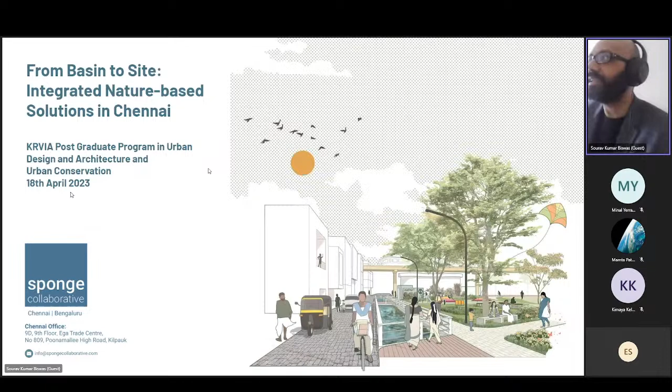Today I'll briefly go over what have been our efforts in trying to mainstream the Sponge City approach in India, what we have been learning, and how we have been advancing that at the basin scale through strategic basin planning and by trying to influence development plans, and then quantifying and qualitatively evaluating the feasibility of Sponge cities within Chennai through pilot projects, and what learnings we can get from it to really create systemic change.

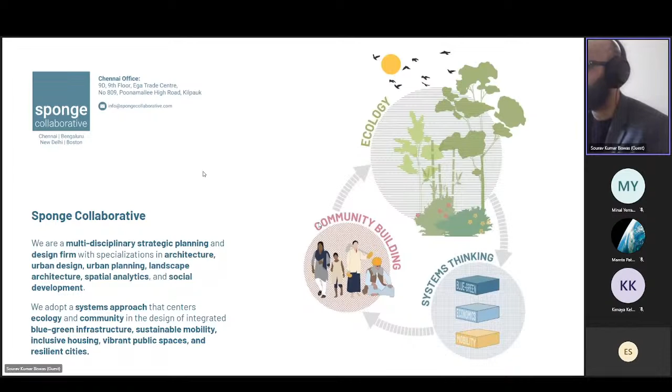So we started as a multidisciplinary strategic planning and design firm. We specialize in landscape architecture and urban design, bringing quite a bit of spatial analytics and centering ecology in the way that we plan our cities and our communities, and how we think about socio-ecological systems through a systems lens. So we're always integrating mobility, sustainability within blue-green infrastructure, integrating culture. That's something that you will see.

Our primary motivation is that we want to be professionals that help communities and cities adapt to climate change. Early on in my career, the 2005 floods in Mumbai basically triggered my interest in landscape architecture. The floods in 2015 in Chennai, followed by the drought in 2019, inspired our first publication, the Sponge Handbook Chennai, which is available online for you to download. That was where we first made the case that the Sponge City approach is really the most cost-effective and has a lot of co-benefits in helping cities adapt to climate change and also meet their service needs.

I'm sure heat waves are going to become a real issue in cities in the coming years. We also find the nature of urbanization actually placing our cities at even greater risk. So our risk threat is not just from climate change, but the way in which we are maladapting to climate change and the way that we are basically disrupting the nature-based solutions that could have protected us from issues that we're actively destroying through bad planning, and that we don't have any structures for how our cities are expanding into the landscapes that could have been building our resilience.

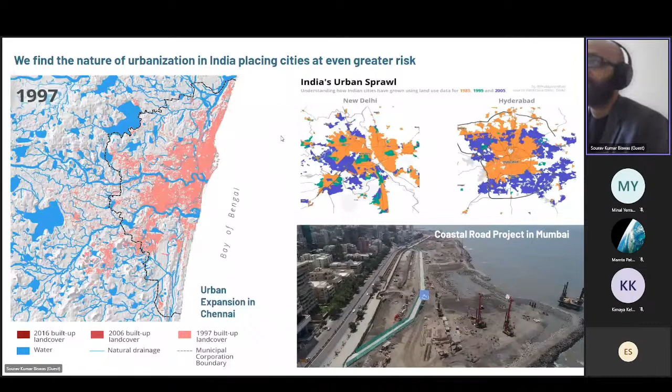So we are here to basically address climate change through the promotion and implementation of nature-based solutions, which have to happen at multiple scales. We have to protect the regional systems that work. We have to restore the ecological systems like water bodies and rivers that are either degraded or polluted, wetlands included. We have to enhance our natural ecosystems to actually be resilient to climate change that will place even greater pressures in more constrained environments. So we have to think about hybrid infrastructures. And we definitely have to construct blue-green infrastructure within urban areas that have completely removed the historic natural functions that used to be there. So how do we kind of bring them back through blue-green infrastructure?

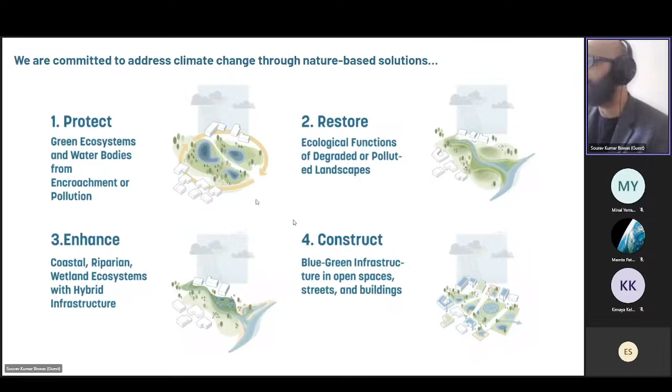We have two partners, Manushi and Praveen. All three of us had met at Sasaki in Boston after them having done their masters in Pratt and Berkeley. And so we met, we did the Chennai competition together that we won with GIZ. We did another competition in Kochi that we also won. You can access both of those entries online if you look for them.

And based on those early successes, we decided that we need to start a firm to really push the agenda in India. We've been dedicatedly doing this through a lot of lobbying, through discussions at various levels, trying to find opportunities through multilaterals and others. In some ways I wouldn't take sole responsibility, but Chennai has moved to the fact that they want to set up multiple sponge parks. They've seen the value of that given the risks they are facing.

We are currently helping the city implement at least one sponge park out of the dozens currently under consideration. We kicked off this whole thing in 2018, even though our firm is about 2 years old. In 2018, we wrote this publication with GIZ that summarized the application of blue-green infrastructure, what it means, how it can be integrated within the Indian context.

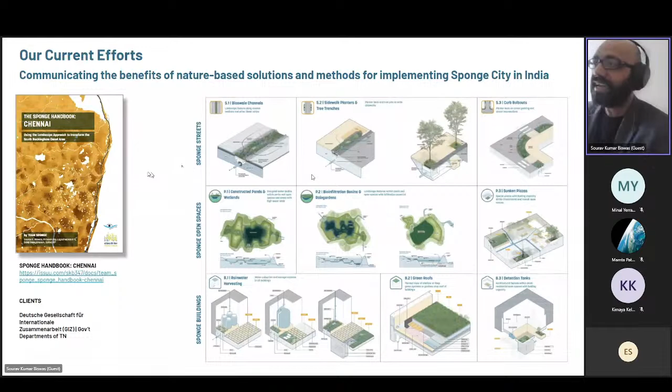We even showed them how to integrate that within the urban fabric in a site in Chennai, taking the basin approach, recognizing that every site has to understand the hydrological linkages that are part of a basin. So we're not just in a river, not just in a canal, we are part of a larger basin that drains into the river. There's also the invisible aquifer systems that are much harder to trace, but they're all part of this one system.

We can build resilience collectively, incrementally over time by being strategic about how we do short-term, medium-term, and long-term projects to eventually do things like canal rejuvenation and then benefit from the real estate benefits that come off of it, and how all those systems, once built, actually make a new development more resilient than what was previously in place. That should be our goal in the kind of developments we do.

Following that, we had successes in Kochi, where we did a detailed project report for the rejuvenation of a canal precinct, where we had a vision for the precinct level, and for how to rejuvenate the canal and connect it to mobility networks upgraded for bike lanes, but also integrating blue-green infrastructure. So how all these systems come together along the streets and also within the open spaces.

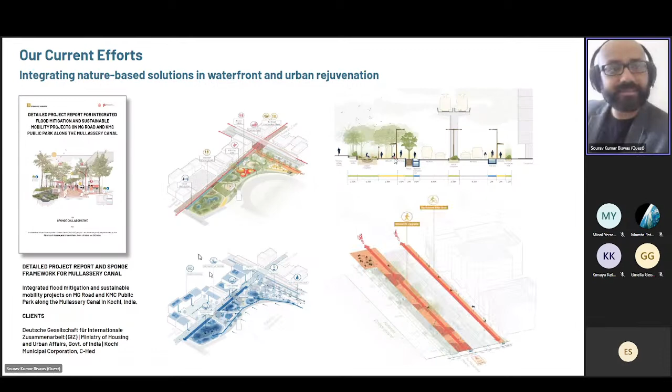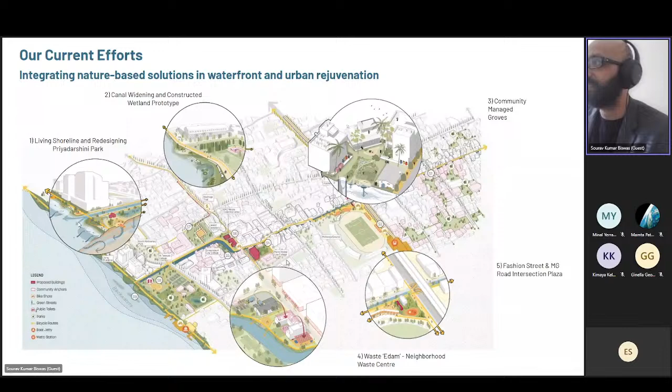The idea is always, how do you find spaces within the city that are designed to flood? So the things that flood are not the streets, not the homes, but these open spaces and blue-green infrastructures within the street. This was the larger vision we had for the neighborhood and how that ties together around the canal. We had different interventions based on aquifer recharge, vendor enhancement, recycling and community-based infrastructure, and even shoreline enhancement and wetland rejuvenation.

A similar project in that vein was in Coimbatore, where with TU Berlin we did a DPR for a sponge park, which integrates social amenities with blue and green infrastructure. Here you can see how we had a social loop with a lot of programs around, very well shaded to counter the heat island effect. Basically we are grading the entire park and creating provisions for water to flow during moderate storms, but also for water to go into the aquifer during extreme storms.

So we are creating these levels of how water collects in different places. There's a wet function and a dry function, where basically it's a park throughout the year, but during any flood events, it also serves as infrastructure.

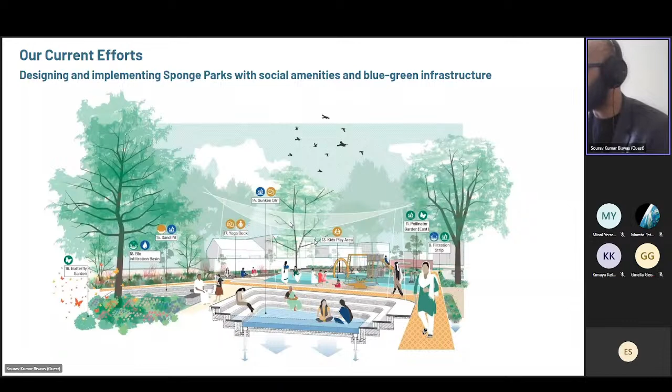We take this concept even further in a peri-urban park we are doing in Chennai, which is a 17-acre climate park, as we are calling it. It's basically a showcase of all the regional landscapes of the Chennai region and how each of them can play a role in climate adaptation, whether it's through the greening of forests or the renaturification, you could say, of—instead of lawns, celebrating meadows—and how in the region, in the farmlands, you build these...

Retention ponds. And then we also celebrate these kinds of hills and hillocks found in the region, through some architectural moves. We also celebrate the coastal landscape, even though the site is somewhere in the peripheries, through the integration of water-based play and water features that teach kids about how important all these ecosystems are. So we focused on these 4 ecosystems found in the Chennai region and found ways to reflect that within the design, planting, and massing of the parks.

So you will find these 4 different zones within the park, which have very distinct, color-coded signages. You have this continuous ribbon connecting all the different zones, but the landscaping of every zone, the architecture, the color schemes of each zone, and even the programs tie back to this idea of what are the regional landscapes, with some signage on how it can help. It's also linked to an archaeological interpretation center because it's located right off of an ASI site.

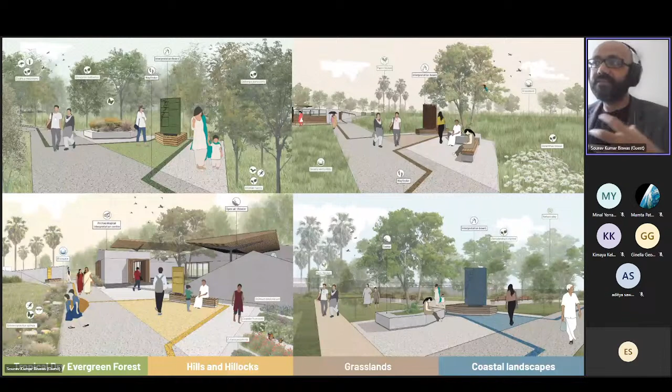We're basically bringing in the geological and archaeological histories of the region with an environmental lens, talking about climate risks. That's just an overview of how we are bringing that approach through multiple projects. But the core of my lecture is about how we are taking a basin level view, how all these systems come together in our thought process.

I'll follow this up with a detailed sponge implementation project and how we went from feasibility towards implementation. This is a project we did, funded by a foundation, where we did a river scale vision. Now we are also working with the CMDA on informing their 3rd master plan on the theme of climate resilience, where this view is coming into play.

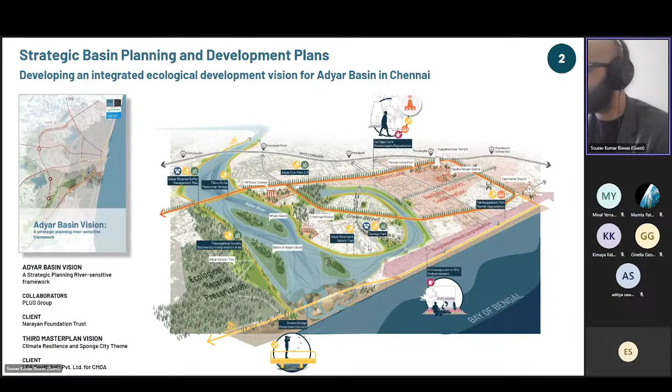One of the things with Chennai, as you will also find out about Mumbai, is the number of basins within the metropolitan area. For Chennai, which is a coastal area with a lot of peripheral landscapes, this metropolis straddles about 4 basins and sub-basins today, but the metropolitan area is expected to expand into 3 more basins in time.

The drinking water reservoir system is also very much linked to the health of the basins. We also have many estuaries and lakes along the shoreline. It's a very diverse shoreline with many different basins and water bodies that are all connected with each other, but all these connections are basically getting severed over time.

We used to have traditional landscapes in the region that connected all these different water bodies. Sometimes you would find temple tanks designed to hold water during the monsoons and allow it to seep into the ground. But all these linkages that used to happen with the water bodies get disrupted by the way urbanization happens, and also by the way mining and other encroachments pollute those ecosystems.

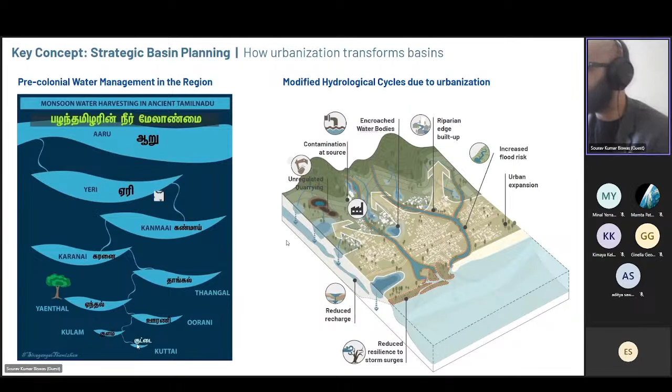So we are trying to counter these impacts by introducing the water sensitive design approach, where instead of thinking about how we very quickly rush water away, not treating the city as a rain jacket, because what it eventually does is create flooding either in the canals, rivers, or reservoirs. It's also not conducive when a high tide comes in and makes that conduit less effective.

So instead of relying on a single conduit, we're basically taking the sponge city approach, finding different ways within the city through open spaces, green roofs, and green streets for water to be delayed. So a storm event doesn't immediately become runoff and land up in the stormwater drains. There is a delay, and that delay builds resilience, but there's also absorption and storage.

All these different functions basically work together to reduce the risk of flooding while creating a lot of co-benefits, because parks are great for many other things. Trees help not just with flooding, but also with urban heat. So that's the kind of approach that we are promoting.

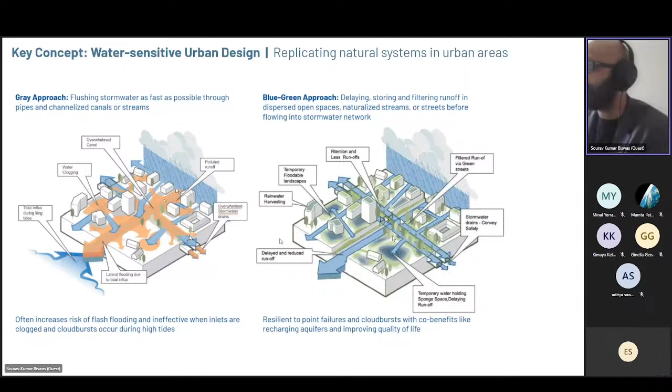Depending on the metropolitan area, there are very different ways in which water resources are managed. It's different in Chennai, different in Delhi, different in Mumbai. But the reality is a lot of water body management, whether rivers or lakes, is very fragmented across different silos. So within that, we are trying to use the tools of planning to embed resilience, whether it's disaster risk resilience or urban water resilience, and we have to be cognizant of how we navigate that.

So in Chennai, we have the opportunity now to basically inform the priorities of the next master plan.

This is something the Metropolitan Authority has had the vision to do, which is actually set up a process to highlight what should be the principles that guide the land use of the third master plan. That is not just a bureaucratic exercise in checking boxes and arbitrarily assigning land uses, but there's actually a vision for it.

From our perspective, we think that no master plan in most Indian cities has actually recognized the ecological systems at the metropolitan scale and what it means to manage urban growth by absorbing the principles of nature-based solutions. So the principles of protect, restore, enhance, construct that I showed earlier, we are basically trying to spatialize as a framework at the metropolitan scale, using a lot of different data sets. I myself am a spatial analyst by training.

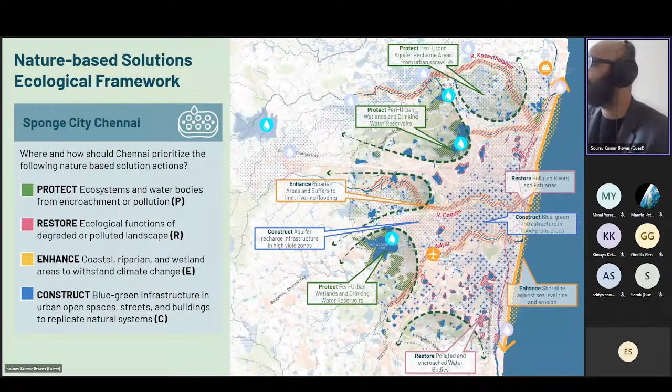So we are identifying which places are important for recharge, which places have a lot of wetland ecosystems, and in a way trying to promote a five-fingered corridor approach rather than continuous urban sprawl. Then we find ways to restore polluted water bodies, or the water bodies currently getting encroached upon in the peripheries that haven't been completely lost as in the urban core. And definitely we have to enhance our rivers and shorelines to deal with additional flood risks happening every year, erosion risks, and saline intrusion risks happening because of sea level rise and cyclones.

So how do we enhance these ecosystems? Finally, we are identifying places with a lot of flood-prone urban areas where we can construct blue-green infrastructure. And in places conducive to aquifer recharge - it's not conducive everywhere, it depends on the soil - we basically construct aquifer recharge infrastructure.

So we are laying out a metropolitan scale strategy within which we are exploring a basin level vision, where we want to emphasize that a river is not just a river. A river is an interconnected landscape where all these streams, when rainfall over the territory drains into the rivers, it's also connected to the groundwater, it's connected to all these things.

So it really matters how the land use evolves, not just in and around the river, but within the whole basin, because it has a lot of impacts on water quality, on sediments, and basically on flood risk. So how do we think about the growth of the city along these two major corridors while also recognizing the health of the basin that's linked to a very important river?

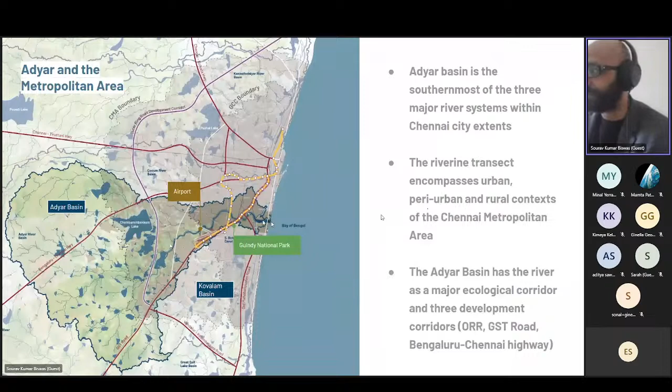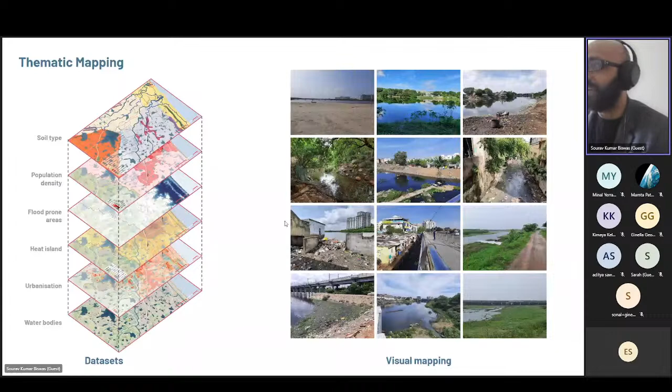So we take on a very geospatial analytical approach, but we also take on a very qualitative on-ground observation approach. Combining this, we come up with character zones for the entire basin, recognizing each zone as a socio-ecological label. So if this is an estuary, what is the land use linked to that estuary? That's an estuary residential zone.

This has a lot of marshes and forested areas, but also that's where IIT Madras and a lot of institutions are, so that's what we're calling it. Here we have an airport, very similar to what is done with the Mithi River - the runway runs right through the river, increasing the flood risk, and this airport basically gets shut down almost every other monsoon.

And then we have the riparian peri-urban zone, and then we have these industrial zones where they've built industries just upstream of a drinking water reservoir, where it's definitely important to think about those relationships, and also these headwaters, which are currently rural but are definitely going to urbanize in the coming decades and years.

And we use these zones to engage many stakeholders to get feedback on what should be the key strategies. Then we come up with a framework for different strategies across five systems: an ecological system, a risk and resilience system, culture and livelihoods, open space and access, and what all these factors should mean in terms of urban development and housing. So it's basically an integrated development strategy that's ecologically informed and really cognizant of both the housing demands of the city.

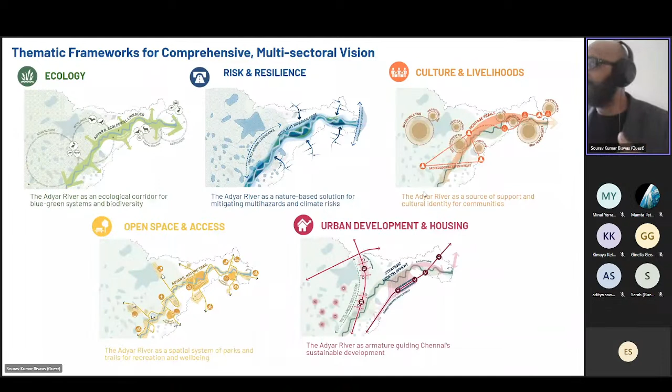The fact that it needs to develop, it needs to grow, it needs to densify, but also it needs to be aware of where not to build, and how to integrate open spaces with recreational amenities to create more buy-in from communities for the continued preservation of open spaces, trails, and streams.

And also keeping in mind that there are still many livelihoods linked to coasts and rivers, and that there are new forms of livelihoods coming up around the river that are more industrial in nature, and how we can basically recognize the historic culture that the region has.

When we talk about a basin vision and want to replicate this approach at the metropolitan scale, we're talking about an urban development framework based on a livelihoods framework, a risk and resilience framework, an open space framework, and an urban ecology framework that forms the foundation.

We believe the role of land use planning is primarily about where not to develop and where to encourage growth, not so much to micromanage exactly what land use goes where, because our institutions aren't capable of enforcing that. But we should build the capacity to enforce where not to grow and where to grow intensely, and how each development could be water sensitive and climate resilient.

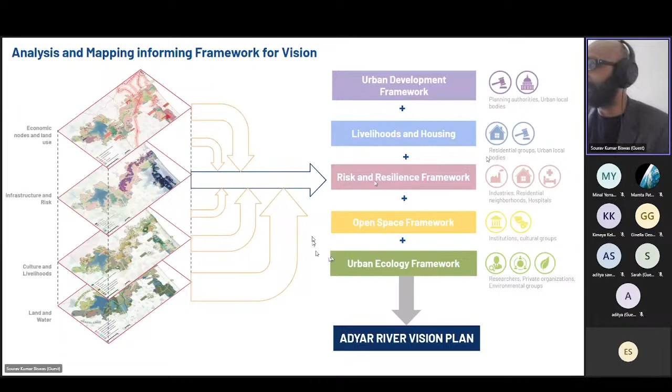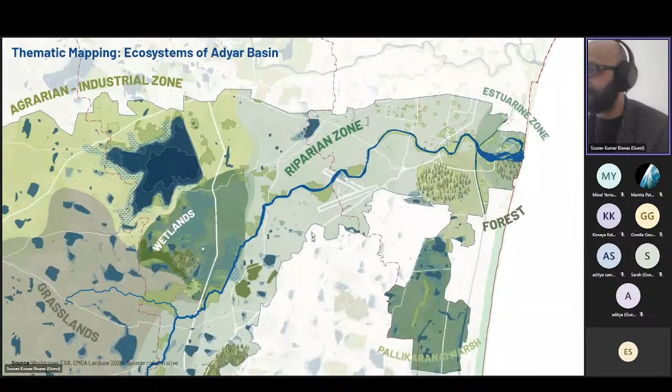So we base all our frameworks on a kind of ecological mapping where we recognize the different zones around the basin and what that means for the riverfront. That basically informs goals, so each of these analysis frameworks has a goal of how we enhance ecological value.

That means recognizing not just the river as an ecological corridor, but also how those corridor linkages can extend into the city, and how we can be cognizant of the different ecosystems the river runs through, from estuary to upland grasslands with wetlands and forests in between.

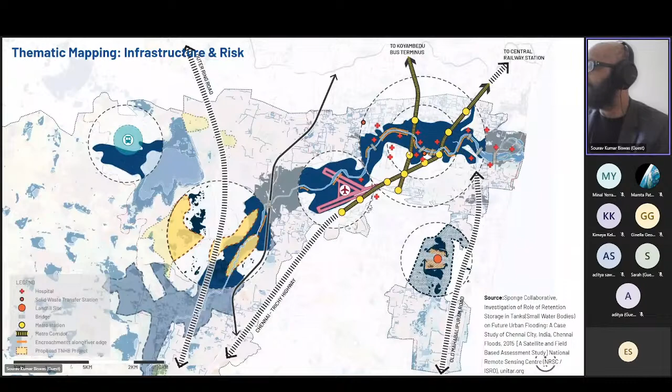Then we start increasing or improving water quality through restoration efforts and enhancing it in other places, by mapping the flood risks with critical infrastructure like ring roads, bus terminuses, and hospitals—places that can increase pollution. The airport is also a critical infrastructure.

We come up with a goal for how we deal with multi-hazard risks—what are the strategies, where those strategies can land, how we create room for the river, that maybe there's a potential scenario where 20 years down the line, that airport gets decommissioned.

Chennai is already planning an airport in a different place. So then we start creating room for the river and maybe even have water sensitive development around there.

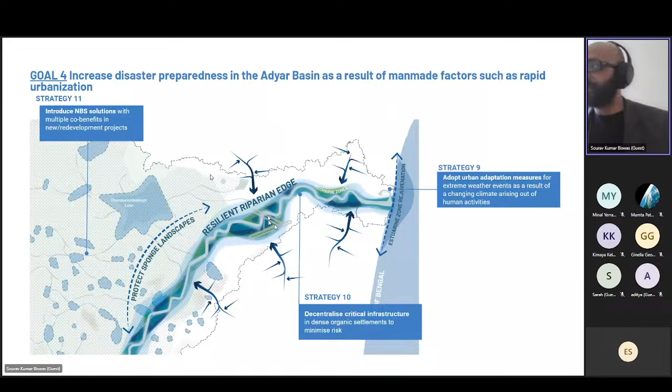We also talk about disaster preparedness, which is not so much about structural solutions, but non-structural solutions for how communities and early warning systems can help.

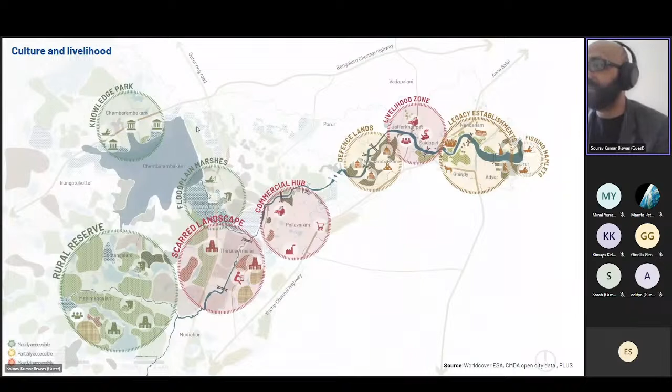We start mapping what are the cultural aspects, what is a scarred landscape, what is a livelihood zone, where are the fishing hamlets, where industrial parks are opening up, and what could become a kind of rural landscape reserve for the city, and how we celebrate that through archaeological site circuits and heritage trails.

We link those heritage trails up with the livelihood zones coming up, making sure those livelihood zones are compatible with the health of the river. So we do have a tannery hub—we just have to figure out how to limit pollution from that hub into these systems.

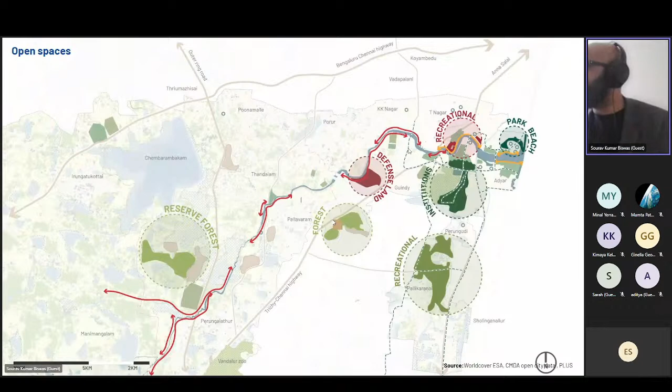So these are just a summary of the different strategies. We have a strategy on open space where we've mapped out the adjacent open spaces, some of which are public, some semi-private or semi-public, but where do we completely not have access to the riverfront, and how can we open up that access.

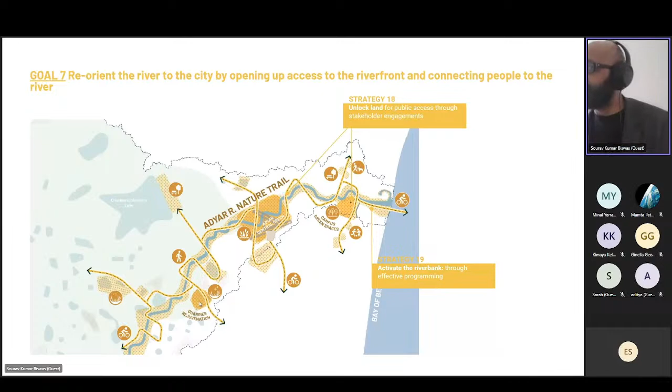Through a set of interconnected trails, we rejuvenate some of the quarries scarred because of mining, open up campus green spaces that aren't currently accessible, and really rethink what happens to the airport in the near future. This is the idea of creating 15-minute neighborhoods where nobody's far from a park—even if they're not near the river, they're part of a trail system that links them to it.

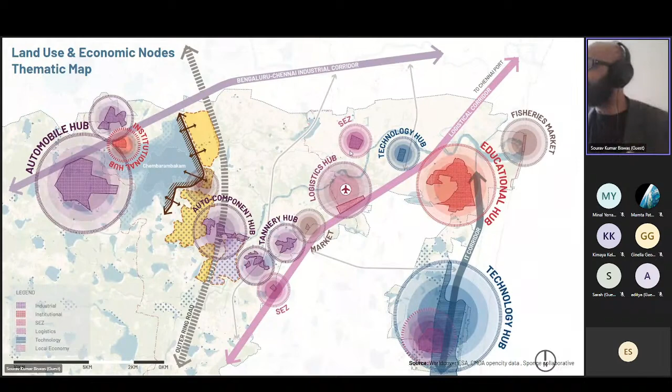Once you recognize how the city is going to grow, where this outer ring road is going to keep building up, where the automobile hubs are, you have to be cognizant of that and keep the protect strategy in mind—finding ways to densify where it's safe from a risk and ecological perspective.

So we're not encouraging sprawl. We're recognizing where transit-oriented development happens, and maybe there's an alternate way for urban villages and rural upland areas to develop if they're not within the corridor, and both can coexist as a diversity of built typologies in the metropolitan area.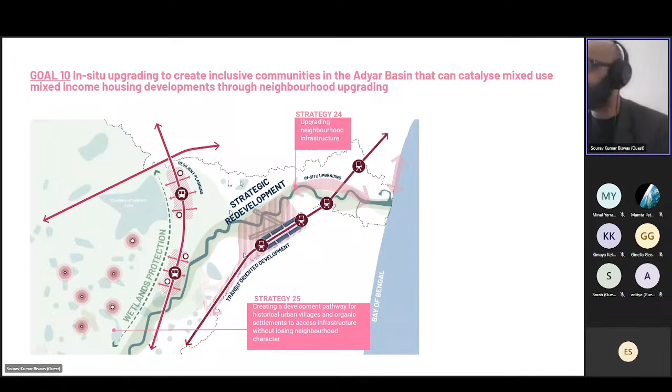That really preserves this rich network of water bodies, which is important for the flood risk of the entire metropolis.

And what we did after those high-level frameworks is we took the 6 zones we talked about and actually landed all those goals within those zones in the form of very specific projects.

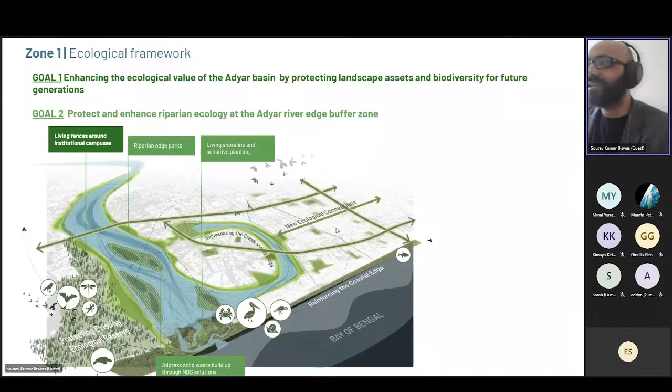So I'll quickly just run through what the ecological framework looks like in the estuarine zone, what the risk and resilience framework looks like when it lands within the estuarine zone, where are places that we can create room for flooding, how we can restore the estuarine area, create access along this broken bridge that we can repair, and then connect that with a cultural loop that connects with the temples and the churches and other open spaces

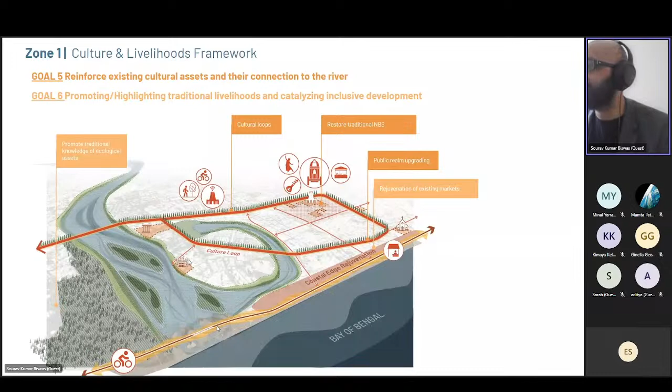And what that cultural trail means in the form of other recreational loops and the pedestrianization of certain areas and the introduction of bike trails and other trails that have currently not been imagined as part of the city's open space network, and how all those different frameworks land in the form of the creation of an urban corridor that's part of, at least in this part of the city, a heritage district conservation, and how, given that there's a bus terminus here, we can think about somewhat of a water sensitive dense development here.

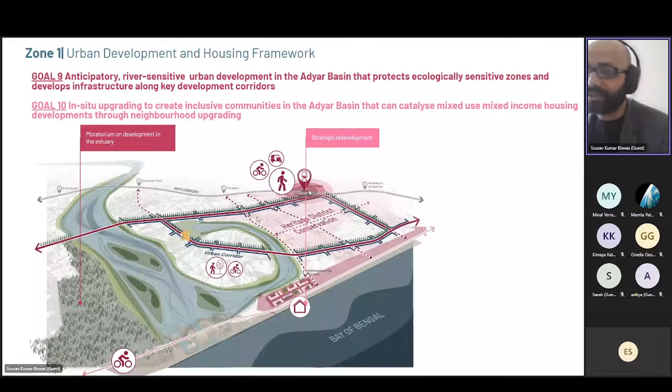But we definitely don't allow development in and around the estuaries in places that are already very well forested. But this also belongs to the Theosophical Society, so this might not open up to development as much. And that together basically gives you a framework and a strategy for each of these zones.

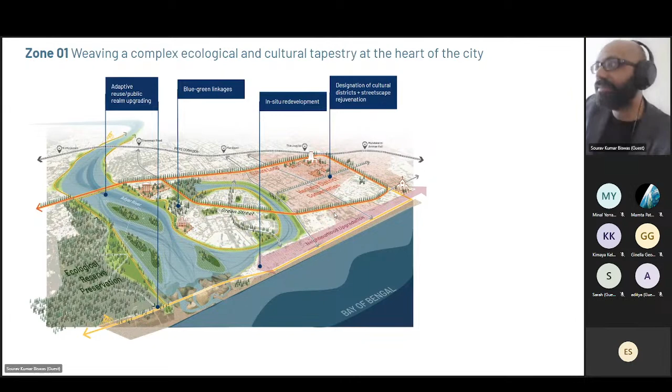We think a river cannot be seen as just one entity. We have to really be respectful and sensitive to the different zones. So we have all those themes coming together to create a vision for this zone. We have a vision for the institutional zone where we have Anna University and IIT Madras and many other institutions, how that can front a kind of institutional connection to the river.

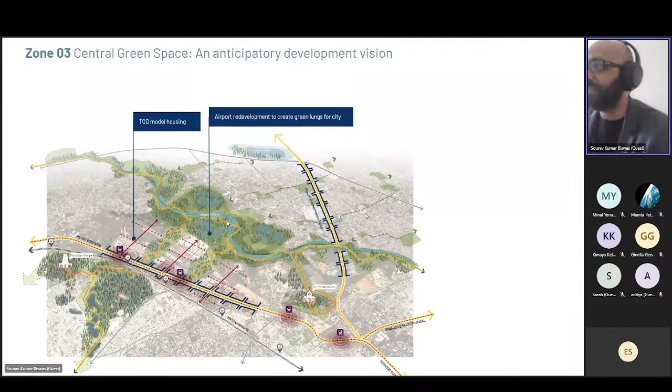And this is basically us reimagining the future of the airport land, where the airport goes away, the runway becomes an armature for a mixed-use transit-oriented development, but a lot of the site basically becomes room for the river, where now the Adyar River finally has that space to flood instead of flooding the runways.

And then much further on in the peripheries, we recognize and anticipatorily protect the streams, not just as ecological risk and resilience enhancing networks, but also that they could turn into open space trails. So again, we are creating a double purpose for an ecological amenity, an ecological system, by turning it into an amenity. So there's more buy-in.

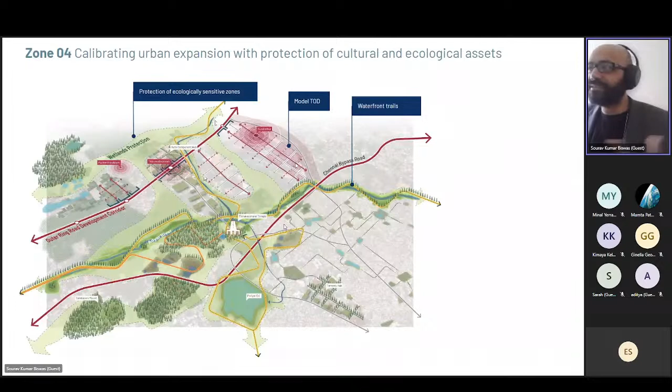And then once the city has planned where not to develop, then you start structuring development around transit nodes, around transit-oriented developments, and making sure everyone has access to the services that they need.

And then finally, in the very uplands, where we have a series of urban villages, we are talking about an alternate future of how we really treat these landscapes and these settlements, how they can still participate in the urban economy, but they don't need to be the city. And maybe it can benefit from cultural loops, tourism loops, agro-tourism, many different aspects, where we are keeping a kind of wedge landscape preserved within the metropolis area.

And this is something that you might see in many Dutch cities. You see it in Chengdu in China. It's what Copenhagen was promoting through the five-finger approach, where you have these green wedges as part of like a lung for the city. And these urban villages can still participate in this urban environment, but in a different paradigm of development.

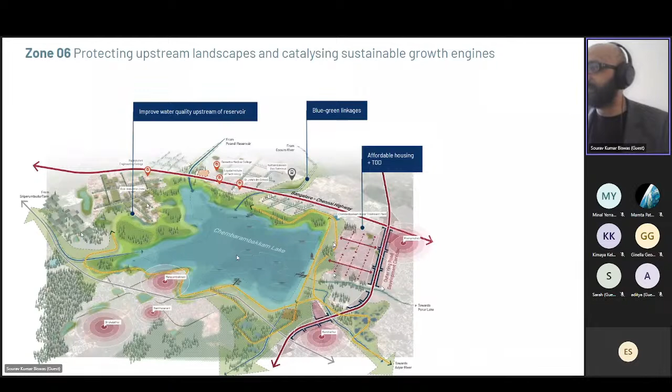And then finally, in zone 6, which is, like I mentioned, just upstream of a drinking water reservoir, you have industrial townships. So how can we make it an eco-industrial zone through the creation of buffers? And how, because of the ring road, there will inevitably be future development here. But it might as well be that the future development is transit-oriented, and that we are creating the buffers that are needed to prevent the runoff from polluting the reservoir, and that we open up the reservoir also for community access. And that's the kind of big idea for that zone.

So all of that gives you an idea of how we are tackling this at the basin scale. And very quickly, I'll show you what we are achieving at the site scale with the sponge park. This might be one of the country's first sponge parks, which was the result of a very detailed feasibility study that we did.

This might be of interest to you if you're interested in this topic. Basically, the design of stormwater drains is dictated by a CPHEO manual that requires cities to only be resilient to a 1 in 5-year flood event. So what we set out to prove is: can we manage a 5-year return period storm through the construction of blue-green infrastructure? Will that network be feasible spatially to construct in an urban neighborhood? And if we do it, is it more cost effective than gray infrastructure?

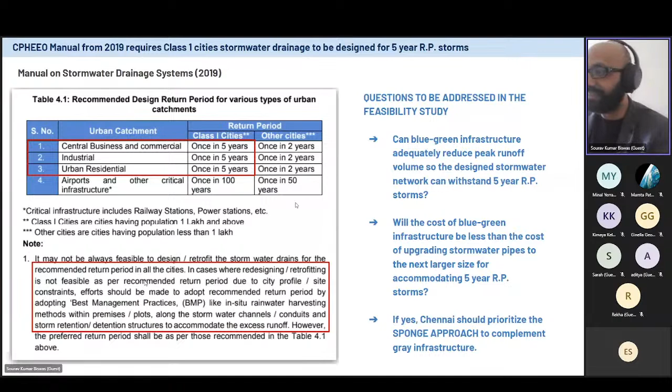If so, this should become the way blue-green infrastructure is integrated into the country, because the manual says if it's too expensive to manage this level of flooding, then try to supplement it with best management practices, which includes a lot of the strategies we're proposing.

One thing we wanted to point out is we are working in another basin of Chennai, in the north, the Kosasthalaiyar Basin. We picked 2 flood-prone neighborhoods to see where our strategies would be feasible. It turned out, after doing a lot of studies, that it's more feasible on this side, so that's what I'll zoom into.

One thing I want to bring to your notice, if you're interested, is we were initially supposed to be planning for 2-year return period storms, which is before the new manuals. And we think even designing for a 5-year return period storm is not adequate.

Basically, what it means is not that in a 5-year stretch you're only going to get that storm once. It means that in any given year, there's a 20% chance of a storm event exceeding the level of that return period storm. So return period storm basically determines how much rainfall is going to occur, and people design stormwater drains around the peak runoff volume that event creates.

People have the misassumption that a 1 in 5-year storm means in their entire tenure it's only going to happen once, when in reality, in 5 years there's a 67% chance it's definitely going to happen, or storms that exceed it. In any given year there's a 20% chance. So people are playing with the risk of only being able to manage these storms even when a stormwater network is constructed. In places that don't have stormwater networks, the risk is just unmanaged.

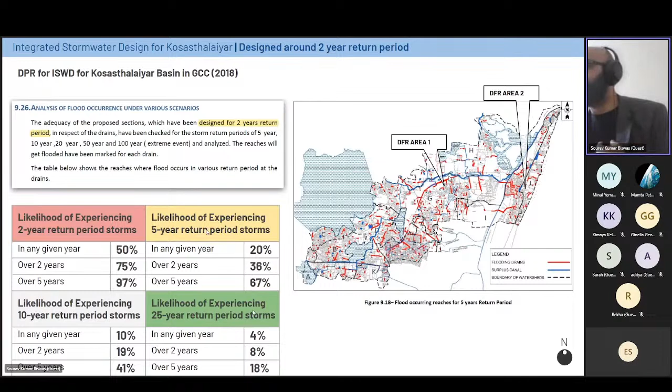What we actually set out to prove is that through the implementation of our network, we are even able to manage a 25-year return period storm without making any upgrades to the gray infrastructure that was designed to only handle the 2-year storm. I think that's a big finding we are going to promote publicly as soon as this project is done.

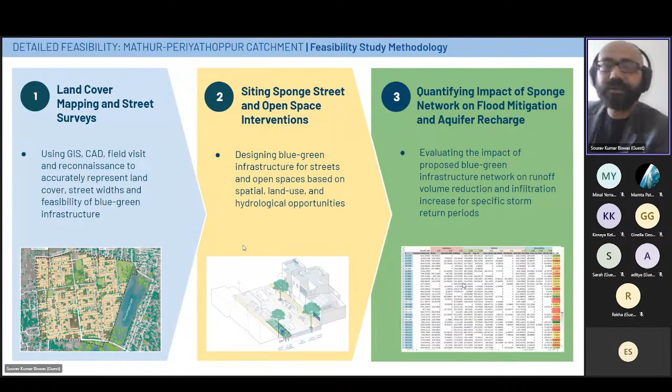We take a very scientific approach to this. We did detailed land cover mapping and street surveys in GIS and CAD, with field visits and reconnaissance. We then evaluated all the streets and open spaces for their spatial potential to integrate blue-green infrastructure. And we worked with IIT Madras and other engineers to quantify the impact of this network on flood mitigation and aquifer recharge.

I don't know how many of you want to move into the infrastructure sector after your degree, but the reason we do this is because runoff is linked to what is the permeability of the area, what is the intensity of the rainfall, and what is the area itself. So in India, infrastructure is designed around: if this is the rainfall event, we have to design for the largest amount of volume, and that should be the sizing of the stormwater conduits.

But nobody really thinks about how we can reduce the runoff coefficient by increasing the permeability of the catchment area. If you manage to reduce the imperviousness of roads by planting more trees, you're creating almost a 5 to 9-fold reduction in the volume your stormwater networks need to manage. That's why we did a very detailed mapping of the land cover, so we can think about ways to modify it.

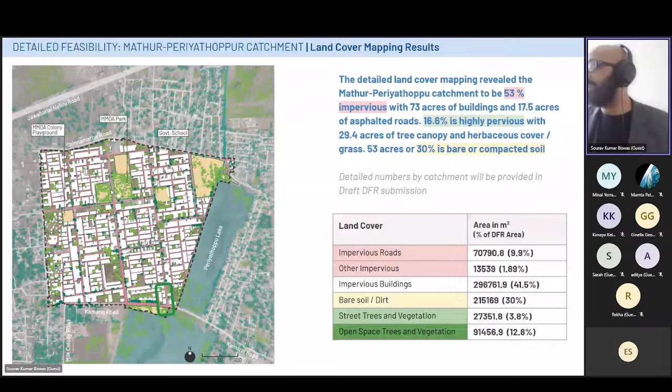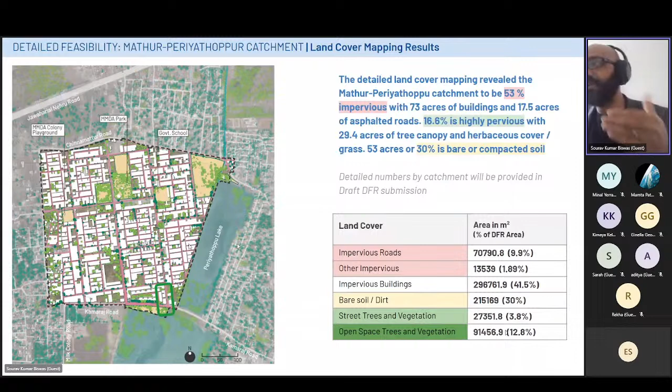We found that this site is this much percent impervious, has this much percent roads, and this much vegetation and canopy. This type of data doesn't quite exist in the way we need it to, so we do the painstaking process of mapping everything from canopies to land cover types.

We do digital mapping, reference Google Street View, reference high resolution imagery, and validate a lot of that with site visits. Then we also go on to survey different sites and streets, recognizing where there's the stormwater drain, where there's the sewage drain, and how the sidewalks are used.

And then we are finding places for these type of interventions to come in. Where can we put in trees and rain gardens? Where can we put in bioswales? Where can we, in the open spaces, amend the soil? Because urban soil is traditionally very compacted.

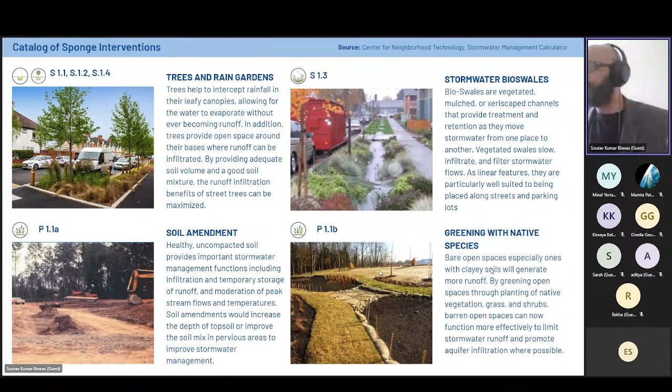But if we just open up the soil and bring in more healthy soil, we are essentially creating storage capacity within the soil and creating more delay. And then using that soil to basically green our open spaces, a lot of which are usually very bare in the urban context.

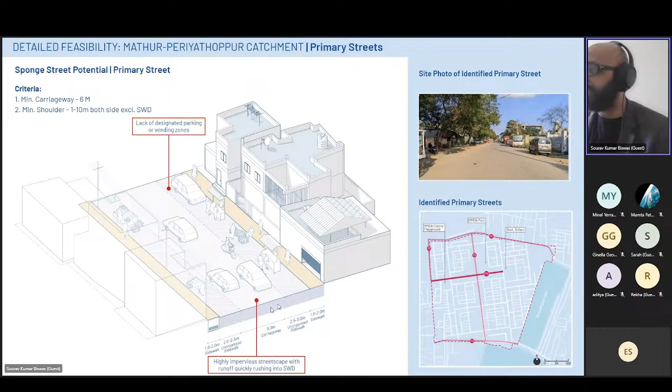And then we basically did a survey of all the streets. We classified them as primary, secondary, and tertiary. I'm only going to show you an example of a primary street, which has a 6-meter carriageway but a very unorganized kind of shoulder with very minimal sidewalks.

So what we propose is, keeping in mind where the commercial entrances, the building entrances, the parking requirements, and where vendors organize are, we organize the shoulder for vendors, and then find places to increase either tree cover or insert the rain gardens that I showed you in the diagram before.

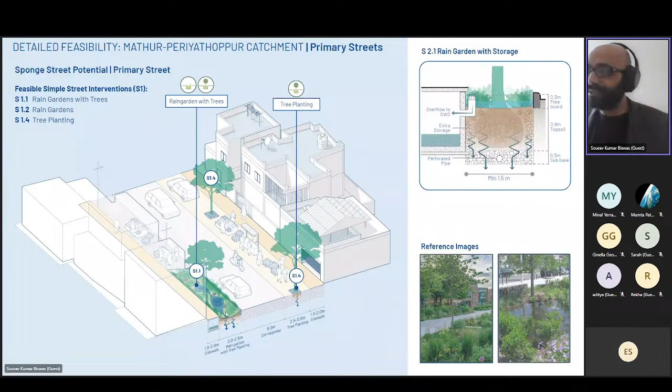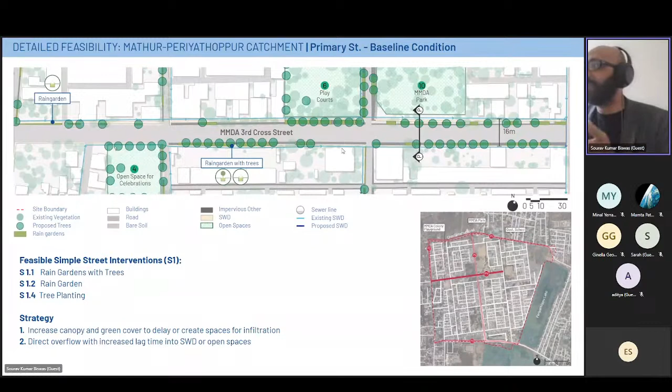So this is what the street looks like today. We know where the stormwater drains are, we know where the sewage drains are, we know what the open spaces are. This is what the street looks like today, and this is what the street looks like in plan, where we are introducing a lot more canopy cover and rain gardens where it's possible for us to do it.

Then that framework is applied across the site, so we can quantify how many rain gardens we're proposing, how many trees, how many bioswales, where we are amending the soils in the open spaces, both big and small. We have quantified what their area is, what their volume is.

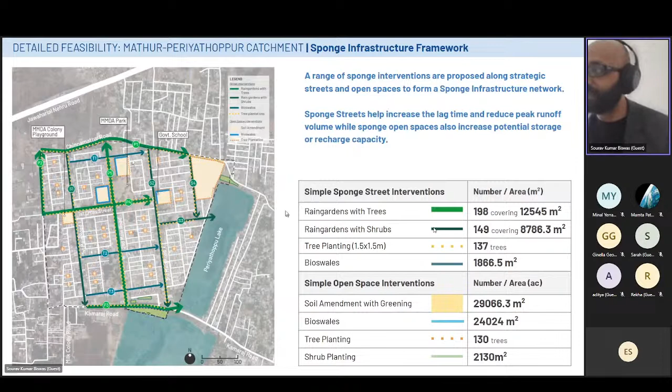And that's when we start evaluating the construction of all these networks and how the runoff from the streets lands up in the rain gardens, runoff from the roofs lands up in storage tanks, and all of these can also land up in open spaces where water is collected for temporary storage, and then water eventually makes its way into the aquifer, which is very important.

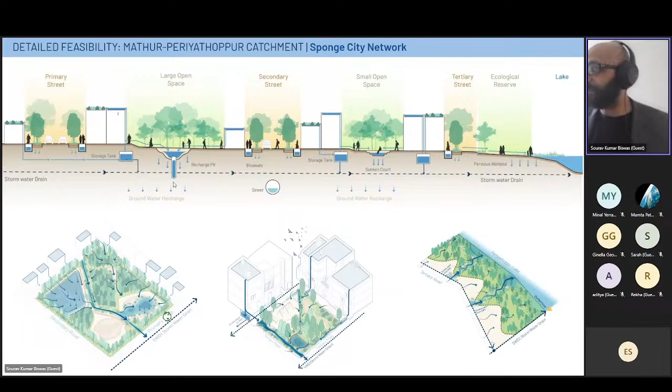So we basically started, after the framework was done, to quantify what it does. We worked with engineers and surveyors to conduct soil tests. We looked at invert levels for where water is supposed to go into the water bodies. We used hydrology software to understand stream flows and how each catchment is managing water, how much water it's getting, how much runoff it's generating, and what that means from a hydrographic perspective.

So instead of getting this much volume in a storm event, we have reduced the effective volume of runoff generated because of our interventions. Through our interventions, we are able to manage that runoff without increasing the size of the pipes, and we have basically quantified what that means.

And the thing that the software is quantifying is how much rainwater the canopy intercepts before it becomes runoff, and how much the soil and the sub-base layer keep storing before it gets saturated. That's when the process of either infiltration or overflow begins.

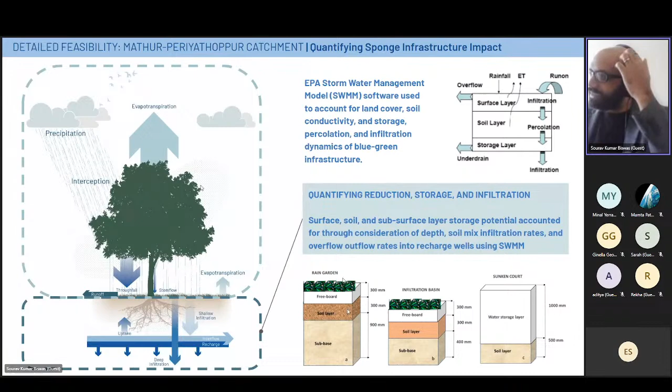So we did that for rain gardens, for the infiltration basins we proposed, and for the sunken courts. We were able to demonstrate that once you implement this, areas that would have flooded in a 25-year return period will not flood anymore because of our interventions, and that we have increased the aquifer recharge by this much, and reduced the runoff volume by this much.

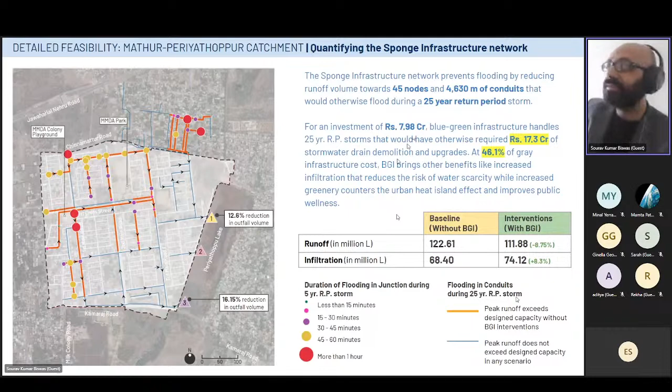And we can do that all for the cost of—we have costed the intervention for less than 8 crores. That basically means if you had to upgrade your gray infrastructure to manage the same level of storms, you would have to have invested 17.3 crores.

We think it's important to think in that term, because a 25-year storm today, because of climate change, might be a lot more frequent in the coming decades. And the other thing that people don't keep in mind is that when they do calculations for a certain runoff, they're assuming the land cover always stays the same.

We ran many different kinds of cost-benefit analysis of what would happen if you actually involved us early on in your design process, and we were to design for a 5-year storm. It would have cost you this much instead of that much, and we are saving you this much money to manage a 25-year storm.

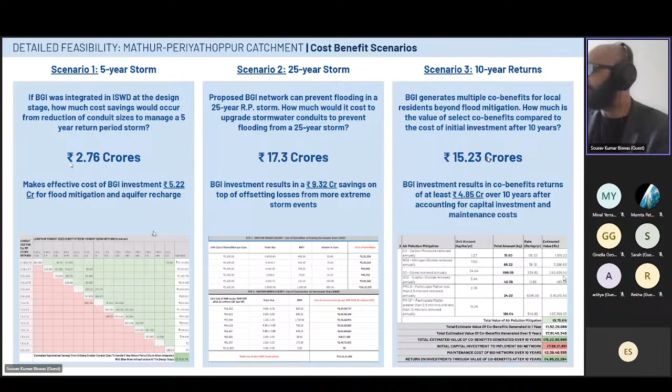And then we also started calculating the co-benefits in terms of air pollution reduction, ozone removal, noise reduction, carbon sequestration. We actually see that over a 10-year period, you're making returns of 15.2 crores, whatever. It's like a co-benefit. It's not monetary value, but it's really value that citizens are getting from an investment that was only about 8 crores.

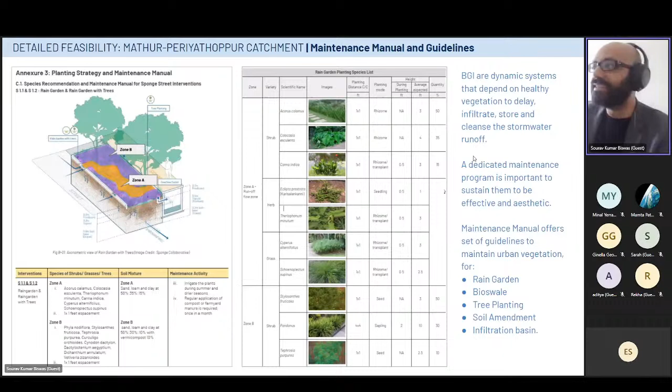We also try to build capacities within the municipalities where maintenance is a very critical issue, and we want to emphasize that. So we have a maintenance manual as part of our project to tell them how to maintain these sponge parks, because vegetation and how long it survives is very important to the functioning of it. And also the maintenance of the outlets and inlets. So we are budgeting all of that into our proposal as well, the maintenance budget, hiring a horticulturist.

And so within this big site that I showed you, we basically zoomed in on this place as where we will do our pilot site. So the feasibility study was to identify how we solve the flooding issue, but also identify what's a pilot project that can most effectively mitigate some type of flooding.

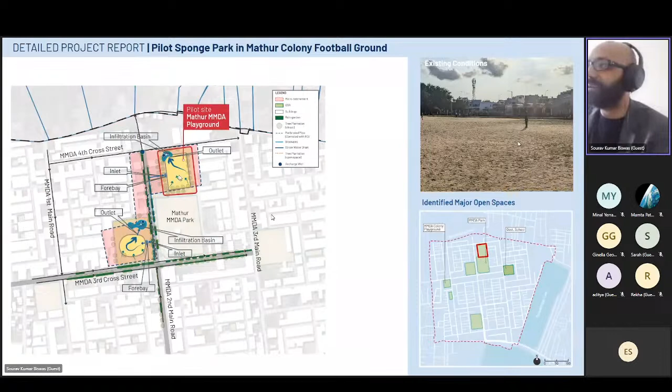So we think within this catchment, sub-catchment, working in this kind of football playground would be an ideal site for the pilot site, where basically, principally what we are doing is turning a very bare, compacted soil that doesn't do much to slow down runoff into something that's amended with soil, greened, forested, and integrating the blue-green infrastructure with certain social amenities.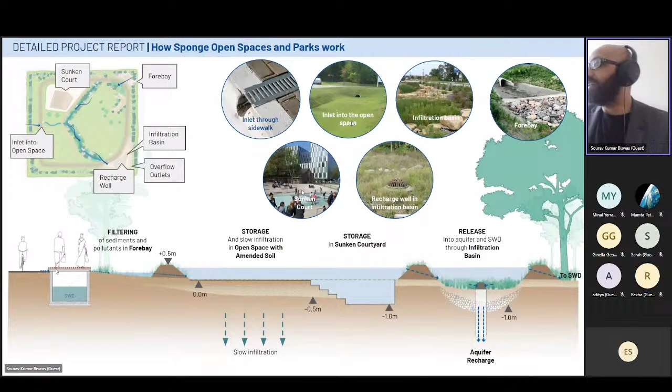And hydrologically, the way it works is all the runoff from the streets goes into a filtering forebay, and then comes into the open space, and then moves into an infiltration basin where there's a recharge well. And sometimes you also put in sunken court. So basically we are creating terraces for water to flow in before it goes into the aquifer and before the overflow of this moves into the stormwater drain.

So water comes in here, sediment collects, it starts moving into the open space that's bunded somewhat, and then the overflow of that moves into the infiltration basin. Some of it starts going into the aquifer, and as all of that fills up, the overflow moves into the stormwater drain. So it's caused quite a bit of delay.

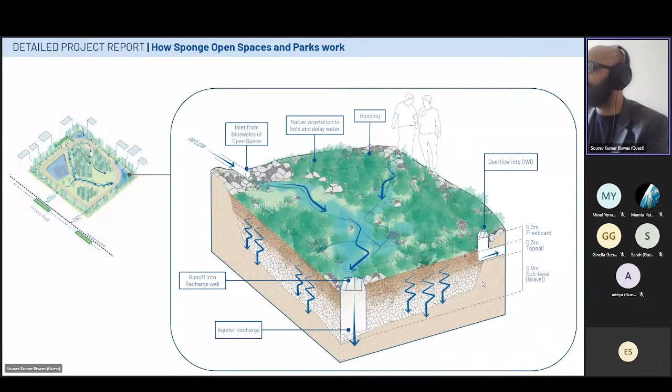It's caused quite a bit of storage in the soils and in these depressions, and it's also creating a lot of recharge. And this is what the infiltration basin looks like at the end, where you have these inflows through vegetation slowly moving into the deep aquifer. It can become a landscape amenity, and the overflow goes into the stormwater drains.

So this is just what the site currently looks like. There's a football field, but the rest of it is quite underutilized. And so again, here we bring the idea of how do we integrate social amenities with blue-green infrastructure. And here the community wanted a lot of amenities.

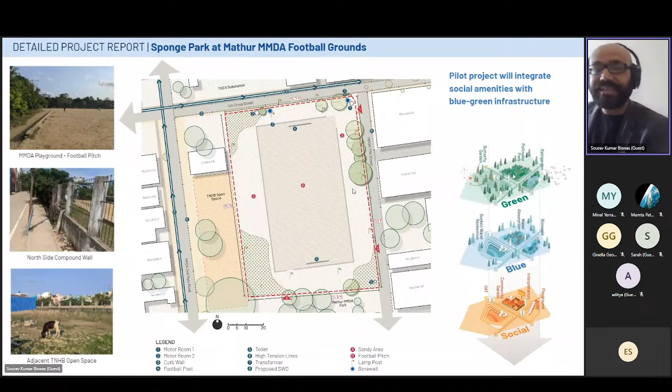So we really had to be very strategic about how we integrate our blue-green infrastructures with social amenities. And so these are the social amenities we proposed, and these are the blue-green kind of infrastructures that are coming together in our design. And so like most things, we have a framework approach to it.

The open space is now an infrastructure that reduces flooding and raises aquifers. We are working with the natural slope to basically create a retention at that end and the recharge at the corner. So we are both delaying, storing, and infiltrating runoff. And then we use the space around the football field that we are proposing, currently underutilized, to create different lush planting zones.

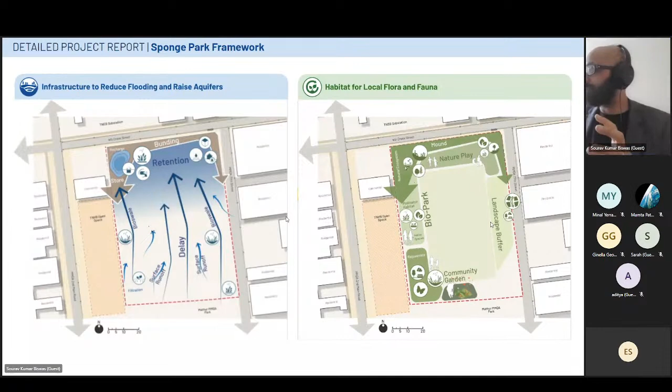And around that, we are creating open spaces and amenities, not just for youth, basically male youth that traditionally dominate big football fields. We are creating other open spaces and small open spaces for seniors, for women, for children, and how all of that basically improves the mental, physical and social well-being of people in the neighborhood, and how all of our planting surrounding the park creates the right microclimate, reduces pollution, improves air quality within which people can jog, do yoga and play football.

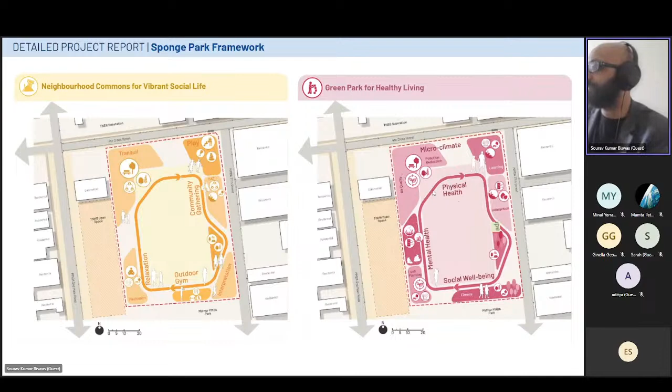We took a lot of community feedback into promoting this approach, explaining what a sponge park is. So they're quite excited about being one of the first neighborhoods to get sponge parks in the country. But we also really needed their feedback on what they think of the social amenities.

We got feedback saying that they're happy to see a park, which currently in a community that has no breathing space for old people and women. So by creating these very diverse open spaces, we are creating opportunities for that.

And the interesting thing is we are getting the funding to do this because we made the quantitative case that this will reduce flooding. So we're basically tapping into stormwater management and flood disaster risk management funding to create an open space for the communities.

That was basically our goal of why we decided to tackle the public sector, and why we thought that flooding and urban resilience is an effective - I wouldn't call it a Trojan horse because it has negative connotations, but it somewhat is. We are couching the whole project from a flood mitigation lens to be able to create social infrastructure that traditionally doesn't get the funding that it needs.

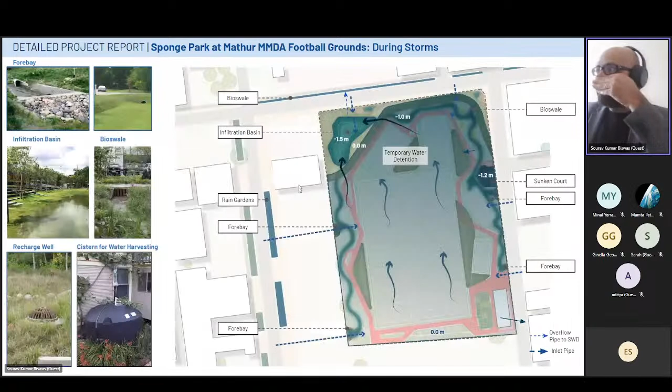So in the community where we did all our presentations in Tamil, we brought up those four systems and how those four systems align as programs, and how the park performs as a sponge park. Instead of having waterlogging make the football field unusable, creating the risk of mosquitoes, by really grading the whole landscape and finding places for water to end up in and leave, we're protecting their play area and also creating more healthy ways for water to move.

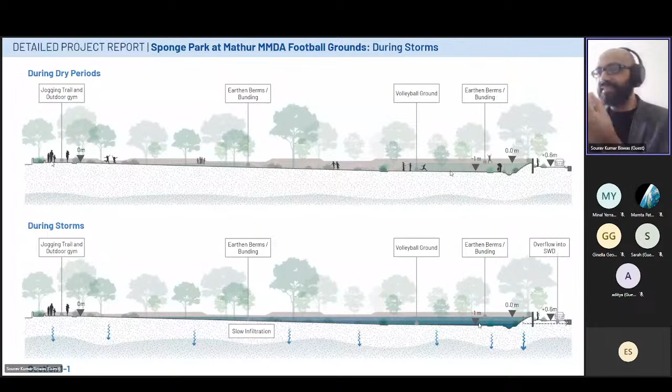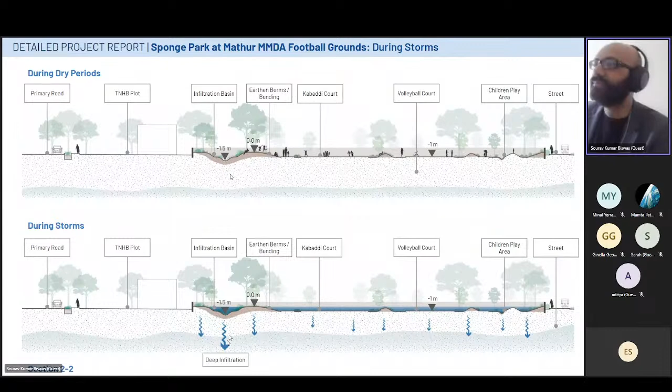So sectionally, this is an exaggeration. We are working with the slope at the low end to create storage capacity here temporarily as they slowly infiltrate, and as they also basically overflow into the infiltration basin that creates deep infiltration. So during dry periods, during storms, we're always thinking about how this multifunctionality can be leveraged.

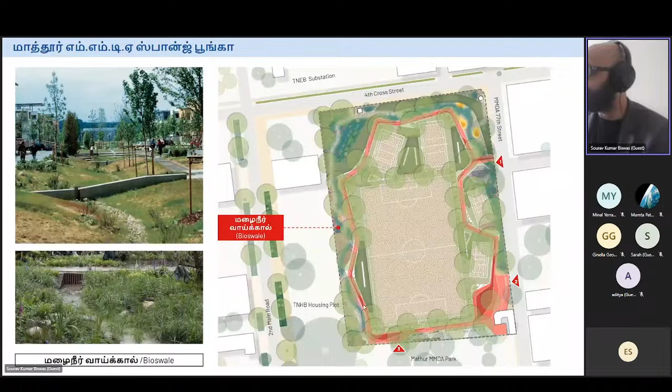And then we ran the community through what the different amenities mean in different parts of the park. There's amenities for old people, amenities for young people, amenities for exercising, amenities for cultural programs. There's also how the bioswale becomes a very nice and peaceful place to walk through, different from the jogging trail. This is how the infiltration basin performs a role, but it can also be a very nice playground and relaxing place and a place to walk around and sit.

And because you recognize how safety in public spaces can be a concern, we definitely make the budget and have the lighting consultants ensure this is well lit at night and used for a much longer period of the day than the park currently is.

So we are getting both social buy-in by improving the amenities, and we have gotten basically bureaucratic and multilateral buy-in because we have proven that this is a flood mitigation infrastructure, and everyone's interested in promoting how many co-benefits it brings, especially when you get the community on board, when you get all the local engineers on board, the ward councillor on board, the joint commissioner on board.

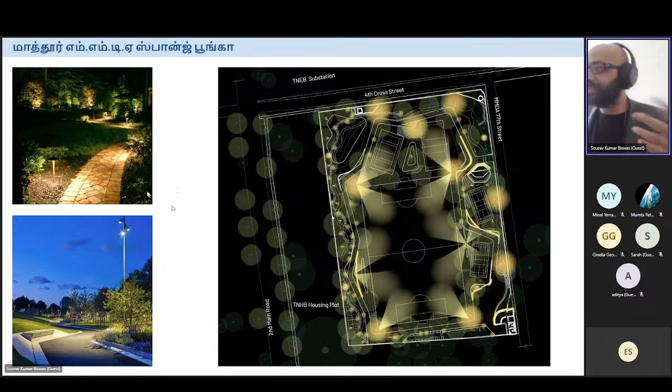So this has been a very political process that we have been navigating very carefully to basically come to a point where we can show a vision like this to the community, and they know that we will at some point definitely secure the funding for it and begin implementation.

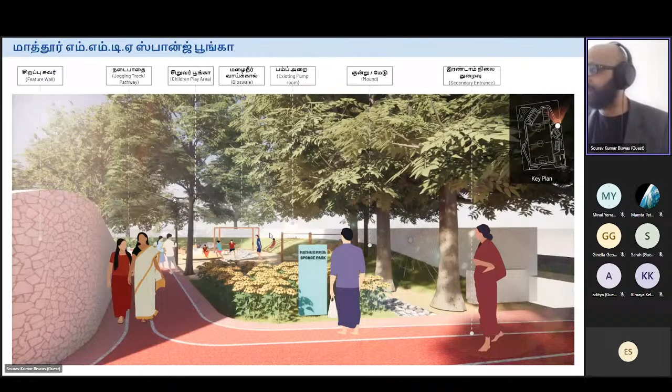So we are taking this concept, and these are the different views from the different parts of the park. We are currently basically developing the DPR, and when it is done, we will be able to, like I said, publicize it properly. But I think the main takeaway as I end my lecture is we have to think about, especially the scale of challenges that we are working on, we have to think about multiple actions at multiple scales all at the same time.

And we basically always couch our pilot projects within a sub-site master plan. We actually drafted the scope for the project ourselves, because initially the intent of people was just, give us a sponge park, just give us a sponge park.

We have to really understand how a sponge park fits into a larger neighborhood framework, because a single park can't solve flooding. But at the same time, if wrong decisions are made at the metropolitan and regional scales, like losing all your wetlands to urbanization or losing big forests, it doesn't matter that you construct a lot of sponge parks, you've lost your natural regional sponge. That's why we also work at the basin scale.

We think by doing these visions, these master plans, and definitely through implementing pilot projects, this is the most important way of moving the political needle. We can actually change things at an institutional level where guidelines now require implementation of this, where even at the central level, the CPHEEO manual that dictates how stormwater drainage is done also picks up on how we integrate blue-green infrastructure. That creates standards that become protocol, so you don't need sophisticated consultants like us in some ways to integrate this approach. It just becomes institutionalized and mainstream.

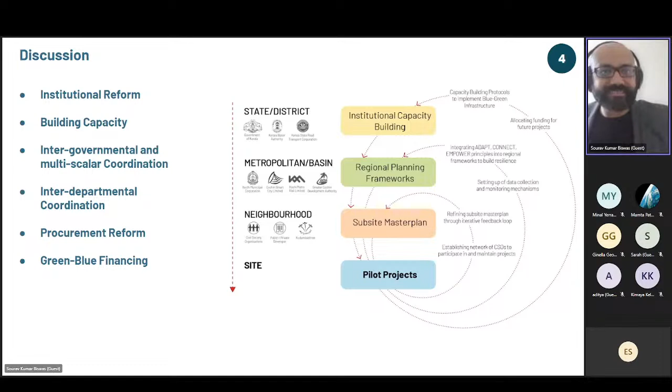Thanks, Saurav, fantastic presentation. It gives us a lot of insight in terms of the work you do and the rigor with which you looked at the pilot project to show that it actually works. Before asking the students to pose some questions to you, I'd like to ask how much of this larger proposition has been incorporated into the development plan of Chennai.

The larger vision is a slow-moving wheel, and the good thing the CMDA is doing, possibly because the World Bank is involved, is taking a very strategic approach to developing the third master plan. There was one consultancy before this about how to institutionally prepare for the third master plan. The ongoing consultancy is called the visioning exercise, where they are coming up with what should be the vision of the next master plan. One of the themes of that master plan is climate resilience and sponge city, literally a theme they want to integrate. We are associated not with the larger effort, but with that specific theme.